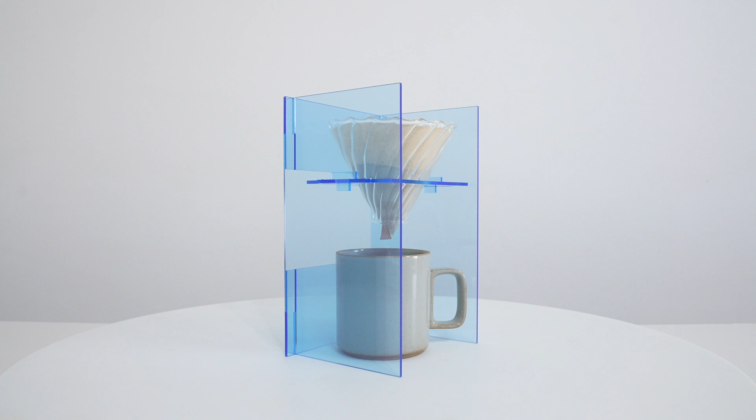Today we're going to laser cut some acrylic to make a pour-over coffee stand.

I recently received an X-Tool Laser Box D1. It's a really easy to use laser cutter, and I decided to challenge myself to see how fast I could design and make a product right out of the box.

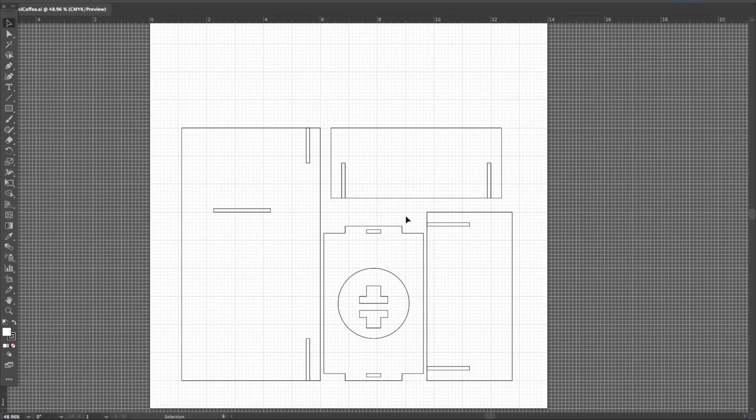The setup was all pretty easy, just basic plug and play. I did have to connect hoses between the air purifier and the laser cutter itself.

I laid out my design in Illustrator. For small projects like this where I'm designing at a 1-to-1 scale, I just like setting up an Illustrator file using grid snaps, in this case set to 1/8 of an inch, which is the same thickness of the acrylic that I'm going to use.

This way I can just draw rectangles or circles and then drag them around and stretch them to the right size. So all I really had to do here was draw straight lines, one circle, and a bunch of rectangles, connect a few pieces, and for the slots where the pieces are going to intersect, I just drew additional rectangles. Who cares if there's some overlapping lines? We'll let the next software figure that out.

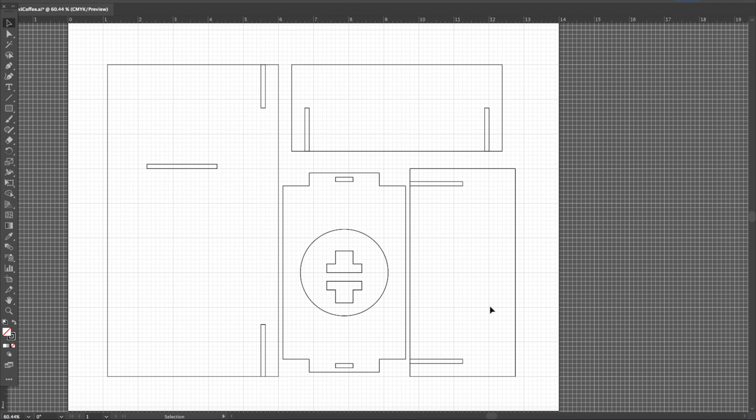It took me right around 20 minutes to design this file, and then I exported it as a DXF. I then opened up the LaserBox software, which is free and pretty easy to use, and imported that DXF.

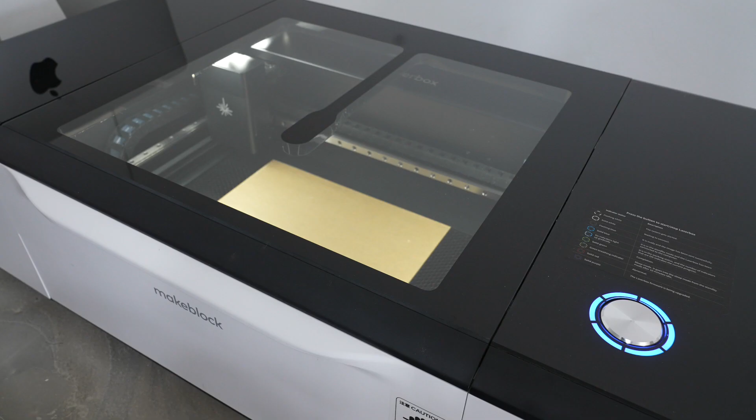You do want to double check your units to make sure that you exported and are importing at the same units, but I got this right the first time, so I guess it's not too hard. From there, you just line up the drawing over the material using the onboard camera to make that adjustment nice and easy. And then I hit the button and let the lasering happen.

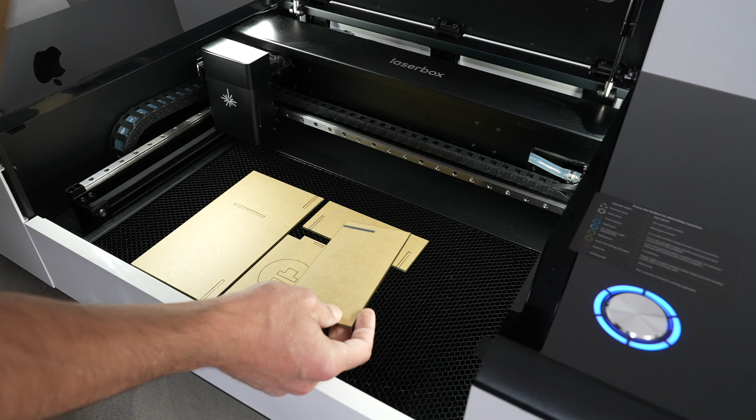It took 8 minutes and 12 seconds to cut out all the pieces on this 12-inch by 12-inch acrylic square. Now, this isn't all the pieces that I need for the pour-over coffee stand. I need one more side panel as well, so I just put it in another sheet and cut that.

I bought this colored acrylic on Amazon, link in the description, and it comes with a paper attached to it, which is great because it protects the pieces while you're working with them.

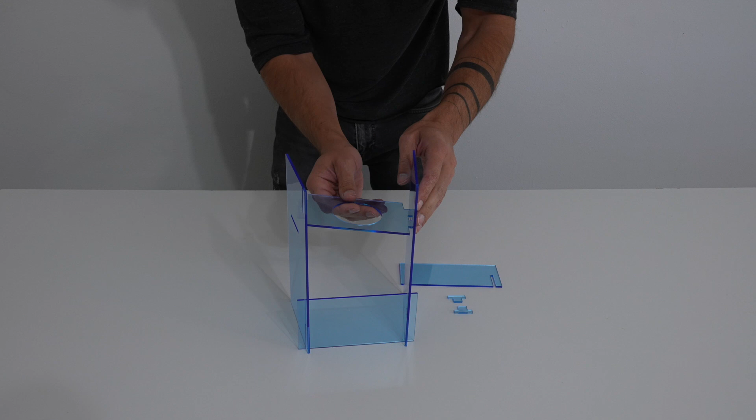Once all the pieces were cut, I just peeled that off and was really pleased at how perfect the edges are. This is what's great about using a laser with acrylic. You don't need to finish anything. It's done. And the edges just look really cool.

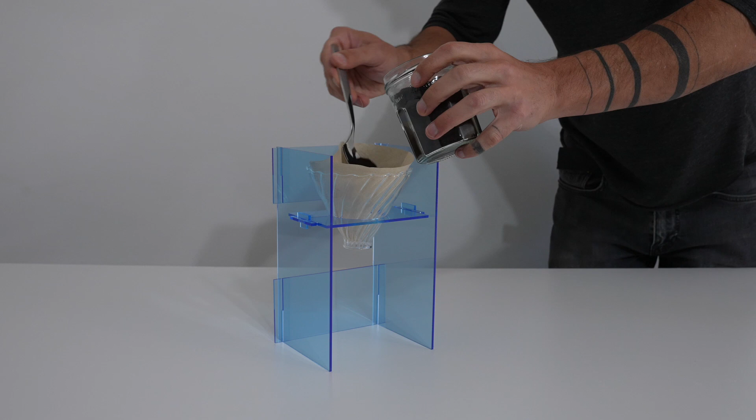I love how there's like a contrast where it refracts or reflects some of the light, and the edge color looks stronger than the basic colors on the planes, even though it's all the same kind of plastic.

The whole design assembled in seconds, not even minutes, and it's a nice functional product that I definitely could manufacture even with this home version of a laser cutter.

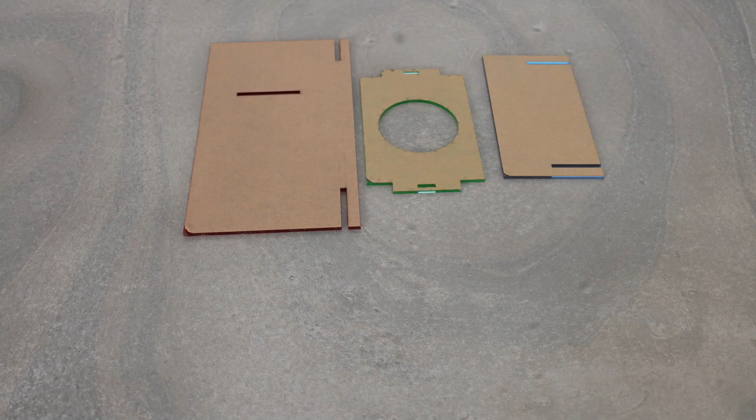I also experimented with some other colors of acrylic. They look good. You'll be seeing some projects involving those in the future.

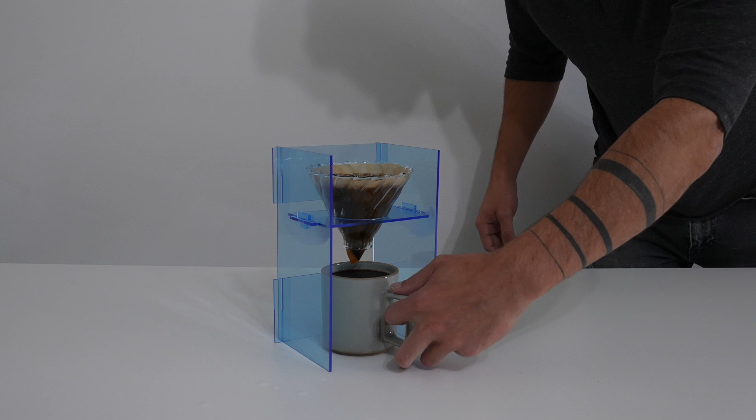But now that we established how easy the machine is to use and that it's totally possible to design a working product in a matter of minutes, let's look at the entire setup in a little bit greater detail.

I connected my desktop to the laser box using an Ethernet cable, but you can also use a USB cable or just do it with Wi-Fi.

The laser cutters can produce a lot of fumes and smells, so I was really happy that they also sent me the air purifier, which works really well.

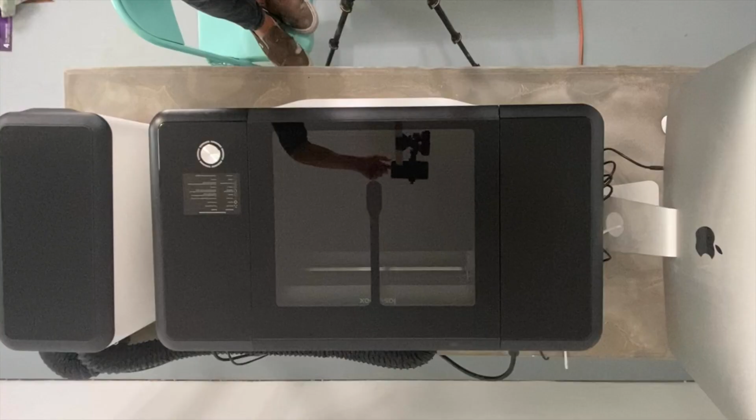All I had to do was just squeeze these little hose clamps to connect the machines together and then take the hose out of the air purifier and just run that right out a door or window. The air purifier is powered by a cable that connects it to the laser box, so I only need one electrical outlet to plug in the laser box itself.

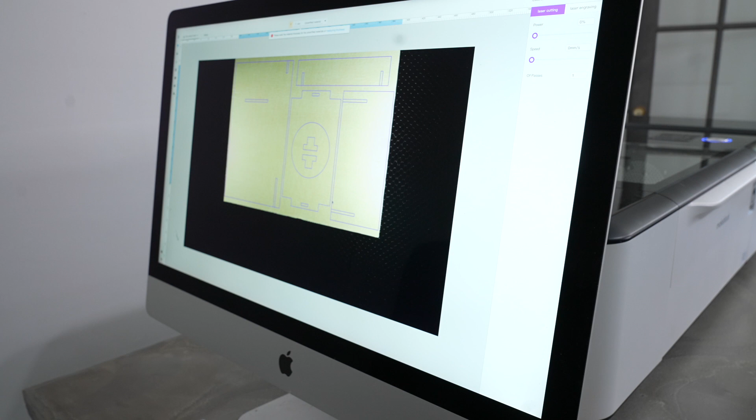I decided to try a similar design on some 1/8-inch plywood and check out how cool this onboard camera is. You can actually see the workpiece within the machine, and so you can line up your digital file right over the top of it perfectly.

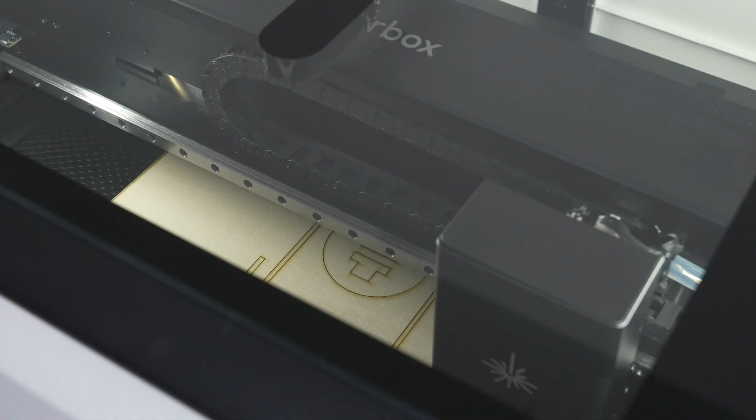This wood cut even faster than the acrylic. I think it was just around 3 minutes to cut out all these pieces. But when cutting wood, it does leave a little bit of burned char along the edges, so you kind of want to rub that off or just seal it with some sort of acrylic spray.

This is a pretty robust machine, and I've only tapped into a small fraction of its capabilities, so keep subscribed to this channel and you'll probably see me using it again in the near future.

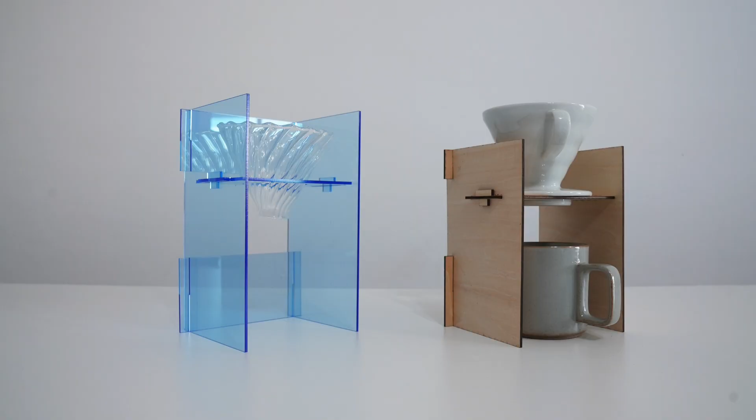But from my experiences so far, here's what I'll say. There were no errors in any of the 10 or so pieces that I cut. It was easy to use right out of the box. And I was able to design and make repeatable products within an hour of unboxing the machine.

So I think there's a clear path to ROI on machines like this, depending on your levels of creativity and design abilities. But it was an absolute pleasure to work with, and I'm looking forward to adding it to my maker rotation.